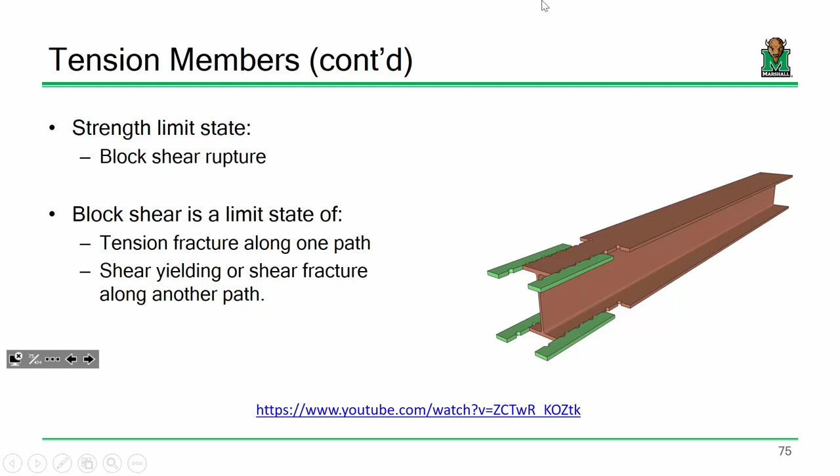So let's start getting into some stuff regarding tension members. Last time we discussed some of the various checks we perform when we assess the capacity of a tension member. Basically, we look at various different conditions, like yielding in the gross section, fracture in the net section, block shear rupture, etc.

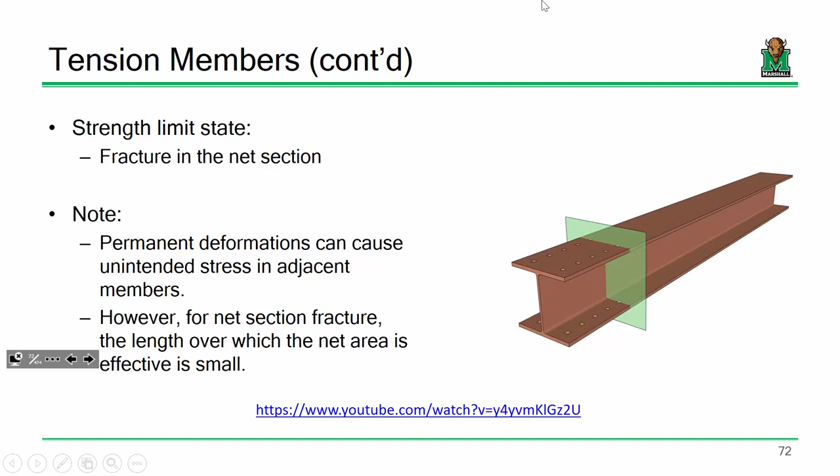And we ask ourselves, based on these failure conditions, say for instance fracture in the net section, we're talking about the phenomenon of fracture occurring right around the connection region. We call that the net section. So we identify that as a potential failure phenomenon, and then we ask, well, how do we compute the load that would cause that failure phenomenon? Another way of referring to that failure phenomenon is a limit state.

So the capacity of that member according to that limit state, if we're talking about net section fracture, would be the tensile stress times the effective net area. So we discussed gross section yielding, net section fracture, and block shear rupture. We'll talk about block shear a fair amount later.

But the idea is that, based on these given limit states, we determine how much load it would take to fail this element under that given limit state. And if we can appropriately calculate that, we can then start to ask the question: if I have a given load, what member must I use in order to safely resist those loads? And that is the design process that we're going to be conducting.

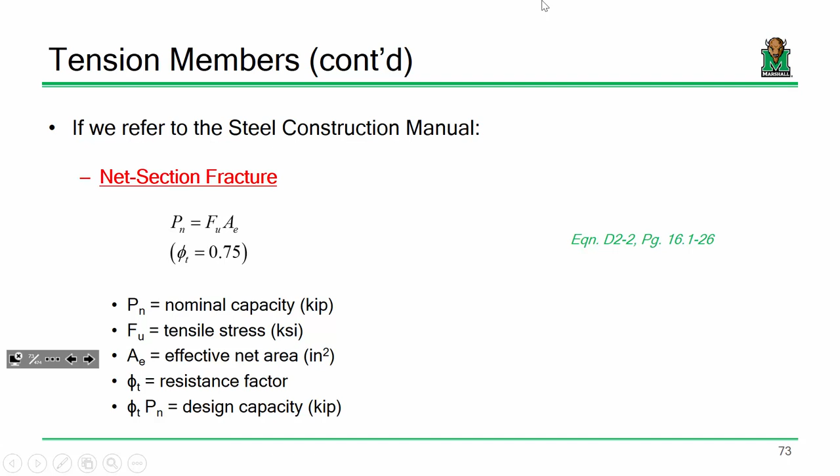All right, so far so good? So we talked about gross section yielding, net section fracture, and block shear rupture. There's also a number of other ways a tension member could fail. Maybe the tension member is fine, and as you're loading the member, maybe it's not the actual element that fails, maybe it's the connection that fails.

Maybe it's the bolts or the welds, or maybe the plate elements right around the connection. We'll talk about bolted connections and welded connections later, but it's worth mentioning. Also, maybe you've got a tension member in a given system, and it's not the tension member that fails or the connection that fails, but some adjacent element fails that disrupts the load in that tension member as well. That's worth mentioning.

All this stuff we're talking about, gross section yielding, net section fracture, etc., that's all strength limit state phenomena. The idea is if I take this member, load it, and reach that particular load, we're starting to develop the onset of failure, the element failing, not being able to resist further load. That's a strength limit state.

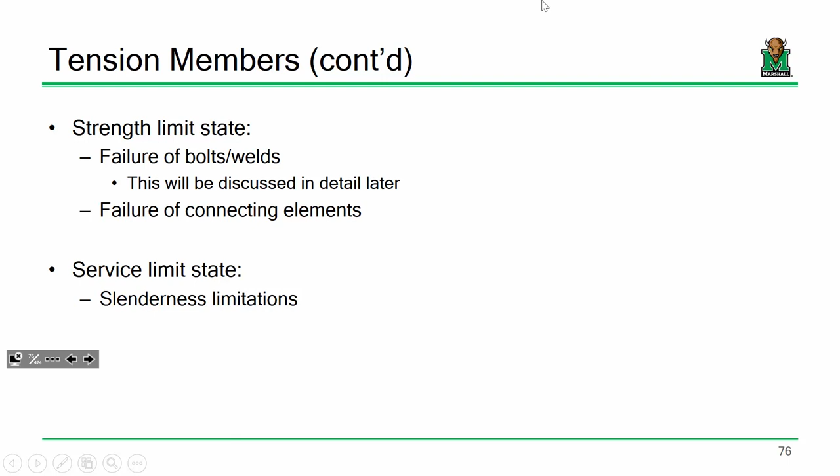A service limit state is intended to ensure that the member performs well on a day-to-day basis, that you can handle it during construction and things like that. One of the limits we're going to use is a slenderness limitation, but we'll talk about that later. Right now I want to focus on yielding and fracture. So far so good? Okay.

Now, in order to start talking about gross section yielding and net section fracture, the first thing we need to discuss is gross area and net area. By and large, the concepts are pretty basic, but we do need a fair number of examples to ensure we're able to compute these values appropriately.

In general, when we're talking about gross area and net area, gross area refers to the main body of the member. So if I've got this wide flange section and I've got a bunch of bolts going through the flanges, the gross section is just the main body of the member out here. The net section is right here around the connection. So if I wanted to calculate net area, in general, the net area equals the gross area minus however much area we're removing, in this case out of those flanges, due to the presence of bolt holes. Does that make sense? Okay.

A couple, just a little bit on terminology. What's it? Yes, sir.

Let me respond to that in this way. So you're saying there's bolts there as well. Well, when we're assessing tension members, what we're assessing is just the wide flange section itself, just the I-beam, if you will. Now later on, we're going to assess the capacity of those bolts by themselves. So we'll look at it as two separate sides of the equation: what's the capacity of the member and what's the capacity of the bolts? Right now, we're just looking at the member, so that area is gone.

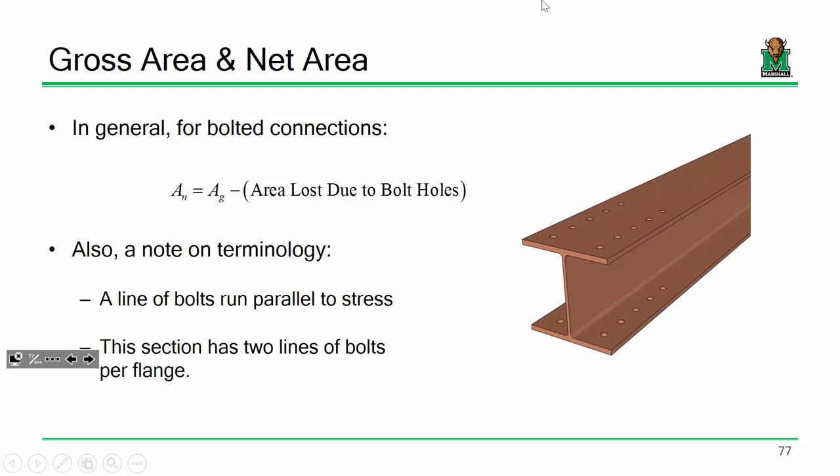Sound good? So 4 lines of 5 bolts. Okay, now let's talk a little bit about the bolt holes themselves, okay?

Now, when we calculate the diameter of a bolt hole, the way that we're going to do that is we're going to take the diameter of the bolt and add to it 1/8 of an inch, okay?

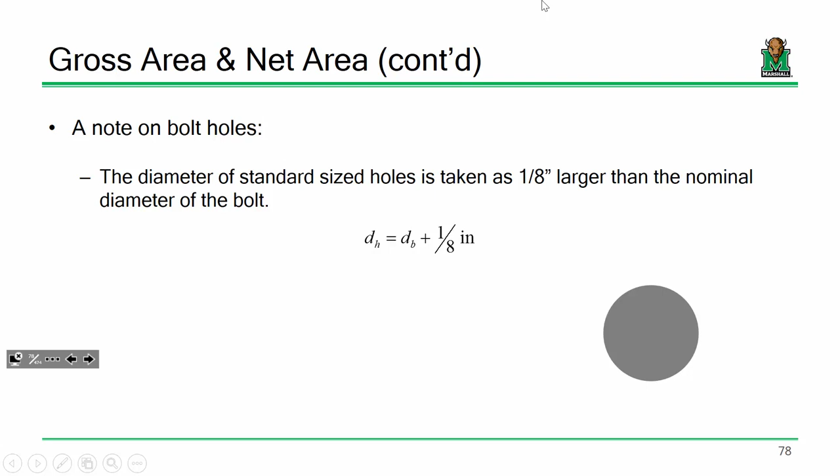Now, here's why. So here I've got an image of a bolt, just a circular bolt, okay? The first thing that we're going to do is we're going to add 1/16 of an inch to account for what we call erection tolerance.

The long and short of that is, if anybody's ever worked with their hands, doing mechanic work, working on engines, maybe working on your car or a lawnmower, let's say you've got a 1/2 inch diameter bolt. In order to secure that connection, the hole that you insert that bolt into has to be a tad larger. You can't have a 1/2 inch diameter bolt and a 1/2 inch diameter hole - you can't get the bolt inside the hole. So you have to drill the hole a little bit larger, okay?

Now, for standard structural steel connections, we drill it 1/16 of an inch larger, okay? So the hole is actually physically larger than the bolt by 1/16 of an inch.

Now that's 1/16. We also add another 1/16 of an inch to account for what we call damaged material. The idea is, whether you're drilling, sub-punching, or using a CNC, you've got to ask yourself, as you're loading this member, you're counting on this connection to transfer load to the rest of the tension member. So what we say is this small little ring of material right around the hole really isn't very effective in transferring stress to the rest of the member - so we sort of disregard it.

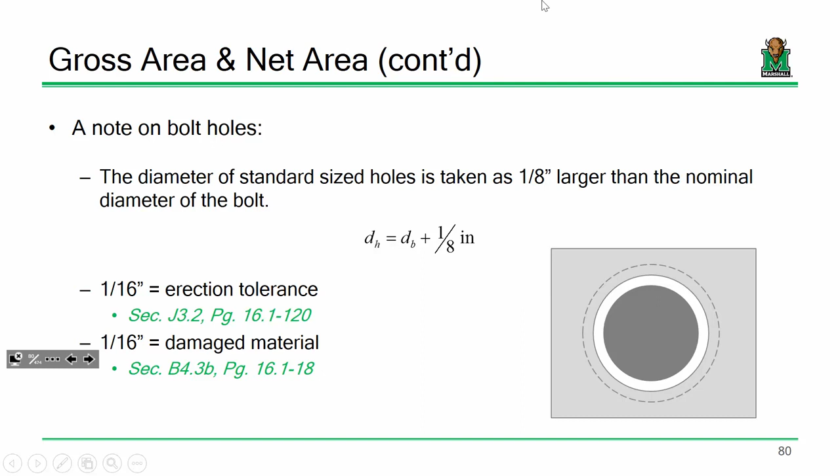One other point I'll mention - see right here, these green sections of text. I've got section J3.2, page 16.1-120, et cetera. That's a reference to the pages in the manual. So if you're wondering where this stuff's coming from, there it is.

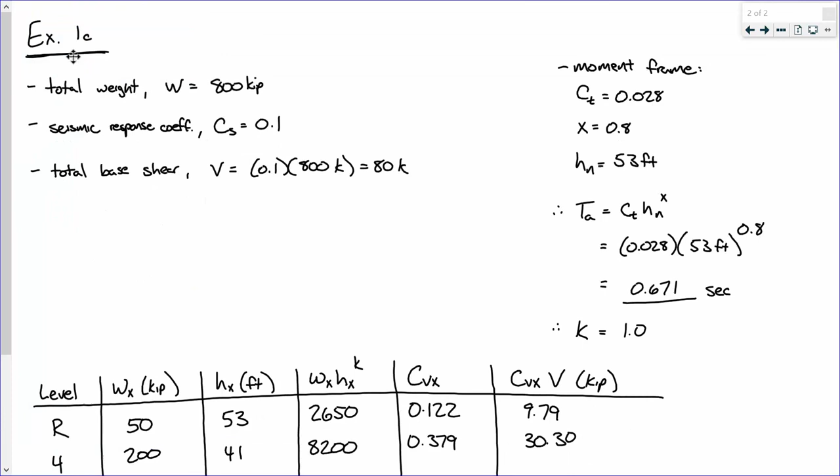So let me erase this. Okay, so example 2A. If I just look at the member in question, it's an 8 by 3/8 inch plate. It probably looks something about like this.

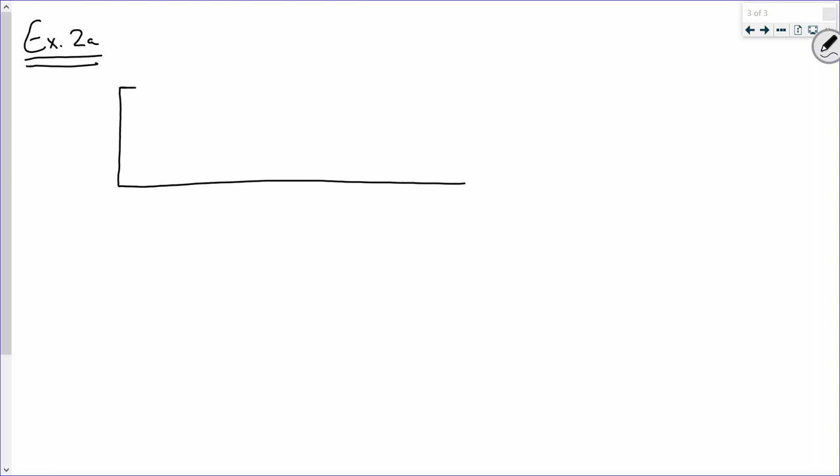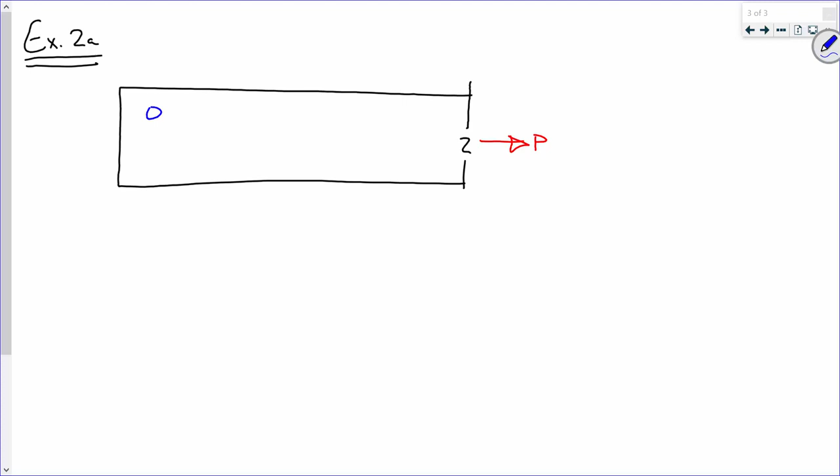I've got this, and I'm going to draw what's called a break line - that's just indicating that the member's going on forever, I guess, in this direction. And I'm applying an axial load P, subjecting this member to tension. Now I've got, what is it, 1, 2, 3, 4, 5, 6, 7, 8 bolts in a grid-like pattern, something like that. Now those bolts are, what were they, 3/4 inch?

3/4 inch diameter bolts - that phi symbol refers to diameter. And this plate is 8 inches by 3/8. Sound good?

Now let me ask you this. In general, what is the formula for net area? It is the gross area minus the area lost due to bolt holes. So if I want to calculate net area, what do you think is the first step? Calculate the gross area. So we need to start off by calculating the gross area.

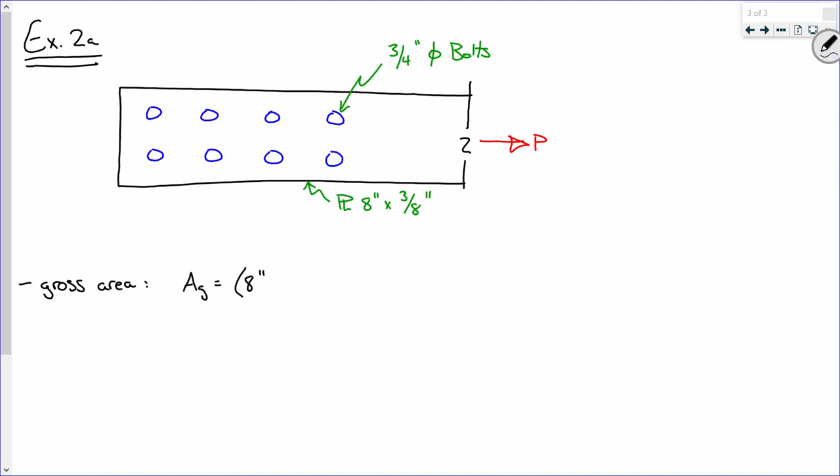So we'll call that AG. So what do you think the gross area is of this plate? Probably pretty easy to figure out. 8 times 3/8. So what does that come out to be? 3 square inches. Simple, right?

Now we need our hole diameter. Now the bolt diameter is 3/4 of an inch. So therefore, what is the hole diameter? Because we take the diameter of the bolt and we add 1/8 of an inch. So that is 3/4 of an inch plus 1/8 of an inch equals 7/8. Sound good?

Now let's talk about this - a couple of questions. Let's take it one at a time. First off, when I calculate net area, I'm taking the gross area and subtracting the area lost due to bolt holes. How many bolt holes do you think I need to subtract? 2. Everybody see that? Now if you don't, think about it like this.

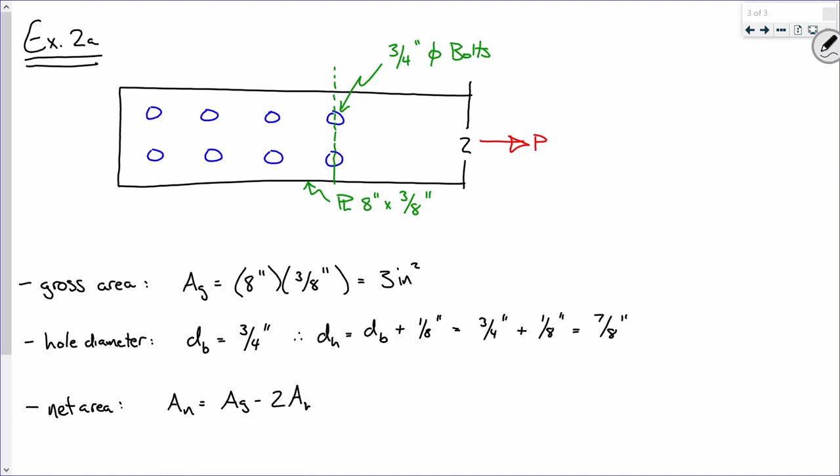So we're cutting a section through 2 bolt holes. So to start off, if I want to calculate the net area, AN, it's going to be the gross area minus 2 bolt holes - the area due to a hole. Now before we start calculating that out, let's see if we understand this. So the gross area minus 2 bolt holes. What is the area of a bolt hole?

What's the area of a bolt hole? Anybody? Pi d squared over 4, right? Sounds good, right? It's wrong. Now here's why.

Now watch this, you got to think in terms of cross sections. Think samurai sword or lightsaber through the section. So imagine if I cut this, what am I looking at? I'm looking at an element that looks something like this. So I've got a plate that goes on, and I've got some bolt holes here. Through that section it looks like that - I know it's a little bigger. This is the area lost due to the bolt hole.

Make sense? So how do I calculate the area of each of those? I take the diameter of the hole times the thickness. Does that make sense? The first time you think it's a circle, pi d squared over 4 - everybody thinks that. But you got to think in terms of cutting a section, right?

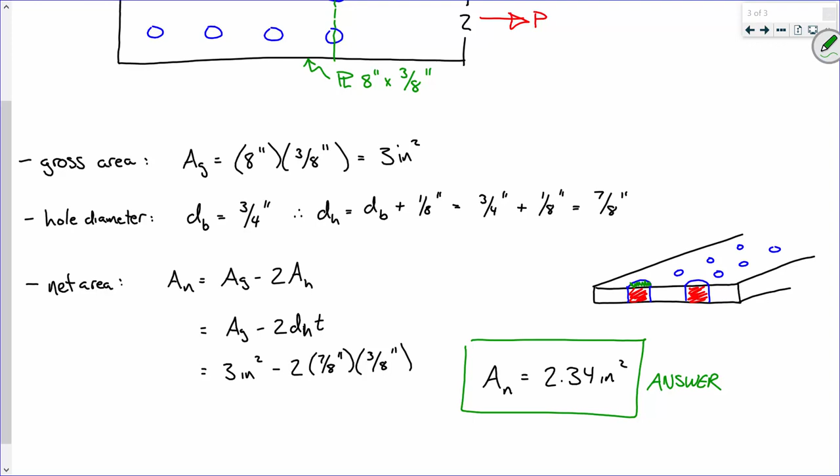Sound good? Everybody else, okay? Now, that's this one, that's a plate. Let's do another one, okay? So the next one is looking at this.

So here I've got a rolled shape. I've got a W10 by 49 that's being yanked on. Again, 3/4 inch diameter bolts are used, and we're going to go along the same process, okay? So to start, let's go into this.

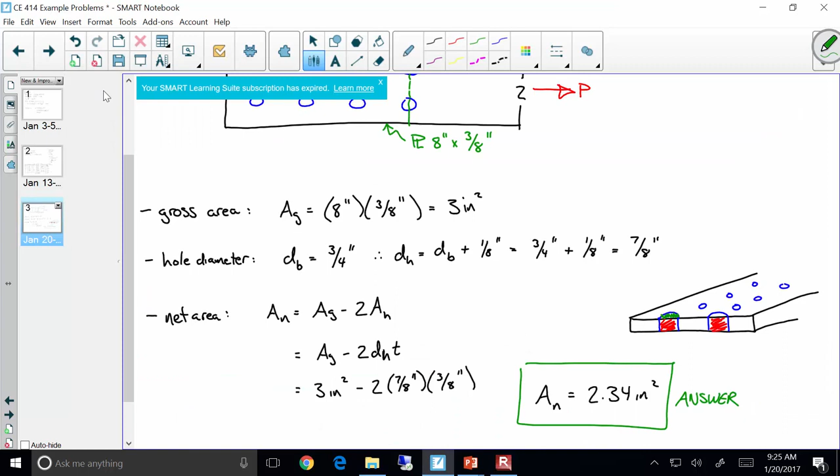So I've got this. Does everybody have the last one? Everybody have all that? Okay, so we're on example 2B.

Similar concept, okay? Now, regardless of what the section is, since you've been through one of these before, I think you can answer this pretty easily. What's the first step in calculating net area? Gross area. So what is the gross area of a W10 by 49?

There you go, so let's look it up. All right, let's leave Siri out of it.

Remember, bring your manual. Did you bring yours? They're very heavy. All right, and so, yes, the manuals are very heavy, and what I have to say to that is this. So, hold on, all right.

14.4. Okay, all right, hold on, everybody settle down. 14.4 square inches. All right, for those of you that brought your manual, let's see if everybody else found that? Okay, all right, first off, okay, that's a good question.

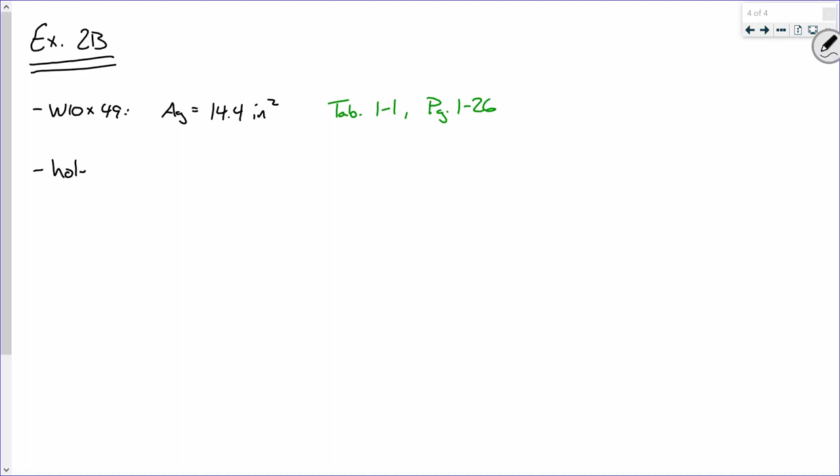Sound good? All right, now same story with the hole diameters. So the bolt diameters are 3/4 of an inch, so the hole diameters are 7/8.

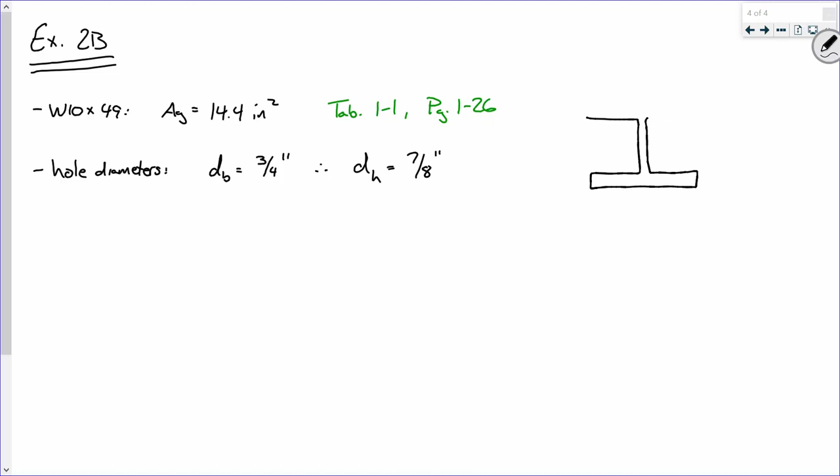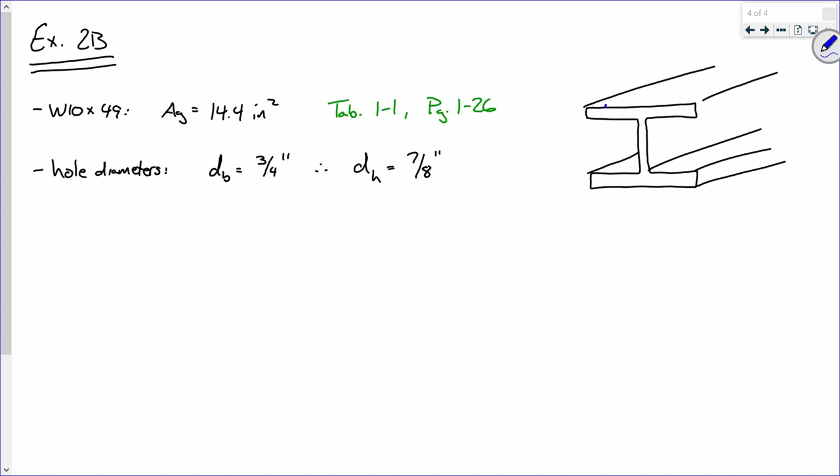Now I'm going to skip writing all that out because we know what's going on. Net area, okay? Let me ask you this: how many bolt holes am I subtracting? Four, okay? Does everybody see that? Because I've got 2 lines of bolts in each flange, right there along that section I've got a bolt here, a bolt here, a bolt here, and a bolt here. So these are what I'm subtracting.

So I propose then that for the net area, I have the gross area, and I subtract from that 4 holes, which is the diameter of the hole times the thickness of the flange. What's wrong? What am I missing? The thickness of the flange.

So off here to the side, what is the flange thickness? 0.56. Does everybody see that? How'd you find it? Google. Okay, you're pulling up the shape database.

Now, if you've got the manual, what value are we not using? You don't have the manual—no, it's 9/16. Okay, let's recall: why aren't we using the 9/16? Yeah, those are the drafting dimensions, okay? So never use the fractional values in the manual—always use the decimal values, okay? So we're using the 0.56.

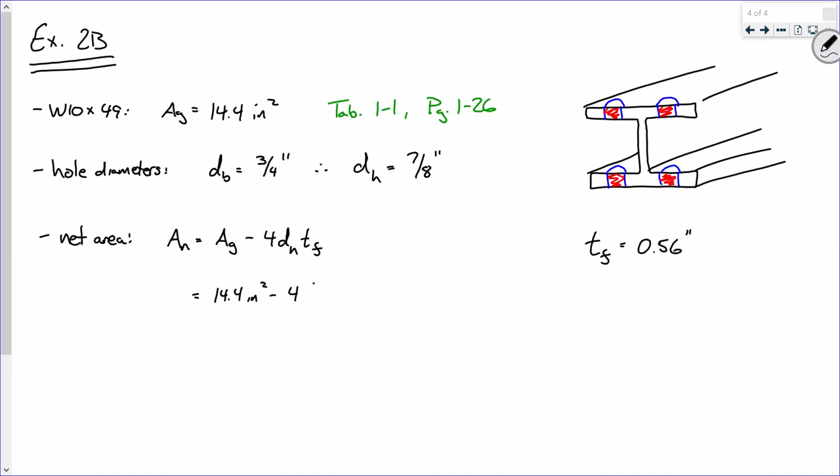So that is the gross area minus 4, 7/8, and then 0.56. So what does the net area equal? 12.44.

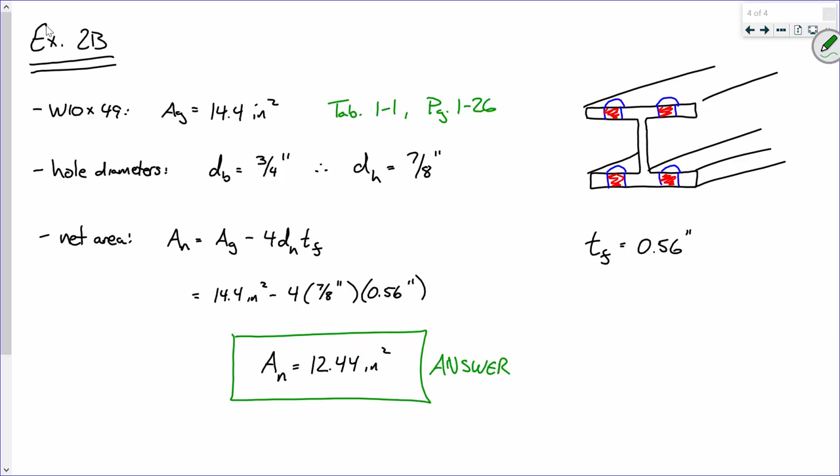Bless you. Any questions? Any questions? You good? What? Right now. Okay.

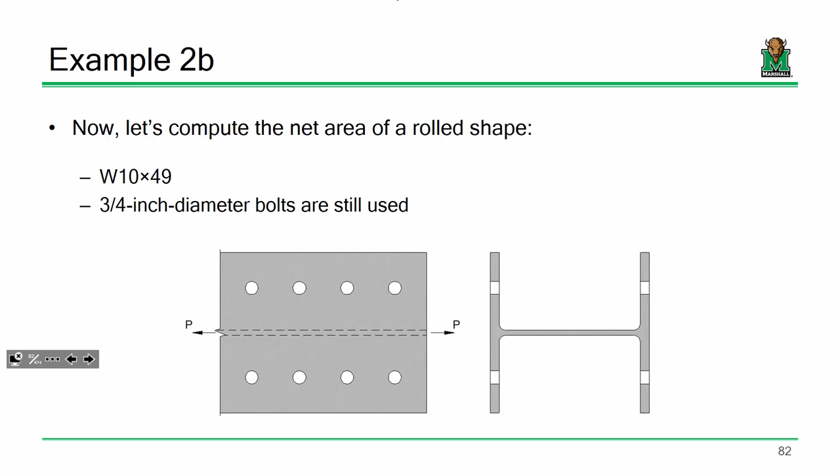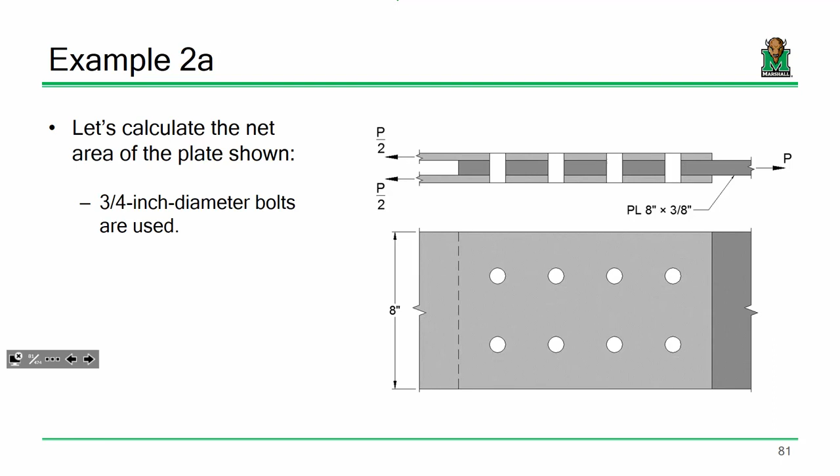Let's talk about some curveballs. Up until now, if you notice, there's a pattern associated with the connections we've been doing because they're nice rectangular grid patterns of bolts. When you cut your section, it's very easy to determine the number of bolts you're subtracting. It's easy for something like this, okay?

So I would say if you want, we can develop a formula for net area as follows: it's the gross area minus the sum of the diameter of the holes times the thicknesses, right? Bless you. That's, I think, a fairly reasonable formula, but it only works for grid-like arrangements like this.

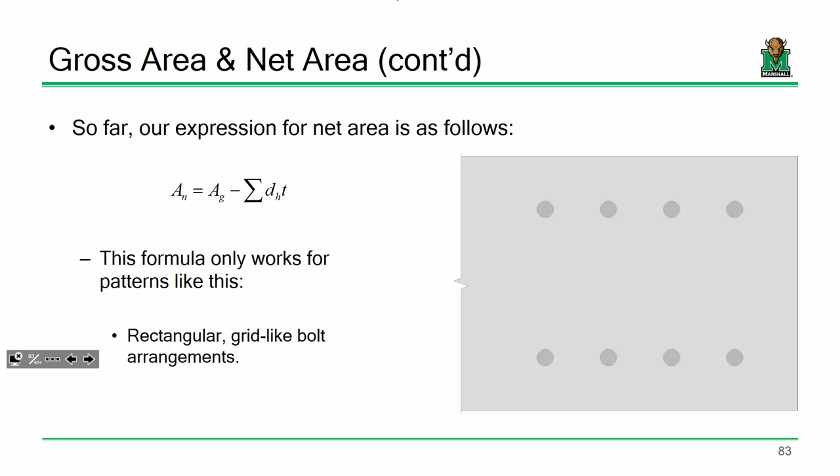Now, the first question I always like to ask when presenting this is, why do this? Why make it more complicated? Why in real life would you ever stagger a bolted connection like this? Well, the answer is really simple, okay?

By staggering the connection, what you do is stagger your failure path, and by doing that you ultimately increase the net area. Now, if I increase the net area, what's that do to my capacity? Does that make the member stronger or weaker? Stronger, all right? So if I've got a tight geometry and I can increase my capacity by staggering the connection like this, I'm going to do it, okay?

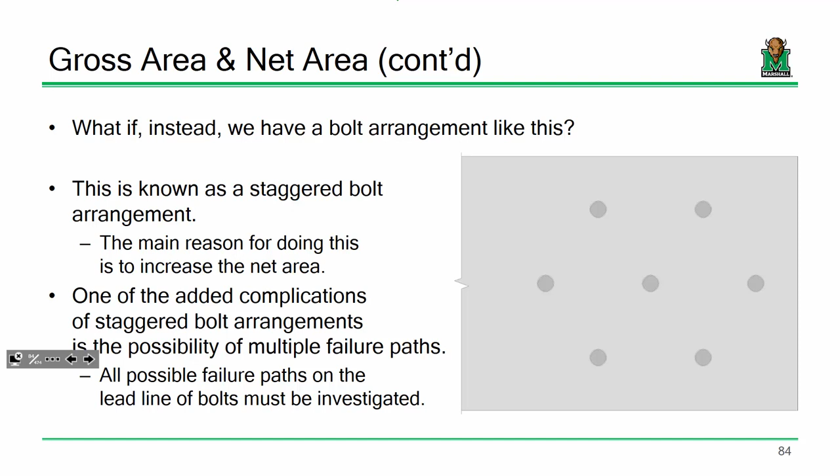Because it doesn't cost any more or less money to drill the holes—if you're using something like a CNC, you just program the machine and hit go, and it's going to go. So it doesn't really cost any more or less money. And if I can increase my capacity and maybe shave some thickness off that plate, I'm going to do it. The problem, though, is that it creates multiple failure paths that need to be investigated.

Now, to give you an idea, I've got a connection that looks something like this. One potential failure path would be just right through that first bolt. Another potential failure path might be something like this—I fail across those two bolts, but then notice how I've got that one staggered path I have to deal with.

Another potential failure path is something like this. Unfortunately, the long and short of it is we just need to go through all of them and see which one is the worst case scenario.

Now the problem is that if you actually start going into mechanics of materials and trying to calculate the stresses along a bolted connection where you've got staggered paths, the actual theory behind it is really complicated. It gets really tough - you've got contact stresses and whatnot, it gets a little nuts. We engineers have to be able to account for this diagonal failure path, but we need to do it in a reasonable fashion.

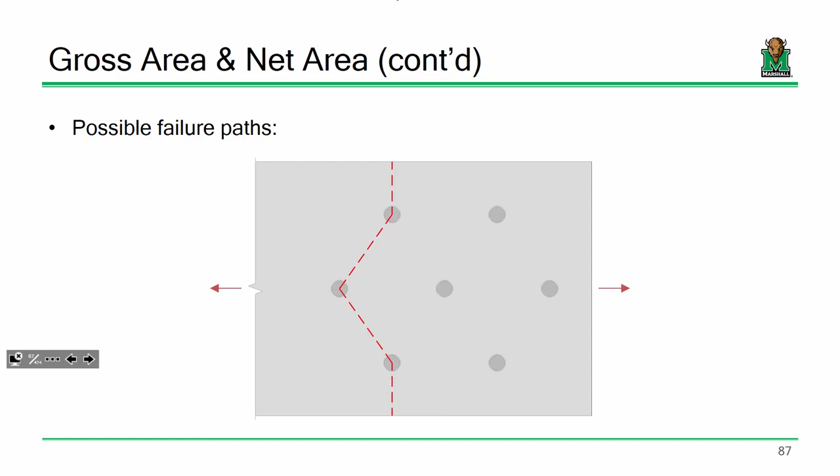Now, the way that we account for a diagonal failure path is for every diagonal failure path, we add what's called a stagger factor. A stagger factor, to compute it, is S squared T over 4G. S is the longitudinal spacing of that diagonal failure path, and G is the transverse spacing. So here I've got an image showing a particular staggered connection. If I'm talking about this diagonal failure path right here, for every diagonal failure path along my staggered connection, I'd have to add a stagger factor for this diagonal path. This dimension here is S, and this dimension here is G.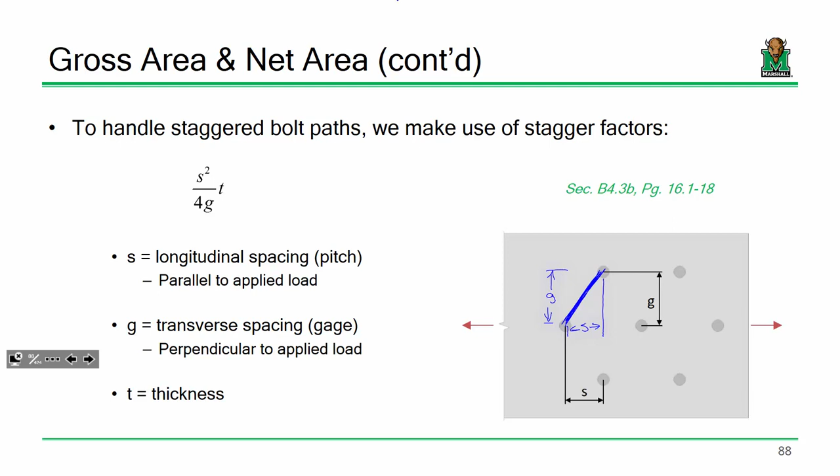Now, the difference is S goes parallel to the stress, G goes perpendicular. So longitudinal spacing is along the member and ultimately along the stress. G, transverse spacing, is perpendicular to the stress. Sound good? Everybody okay with that?

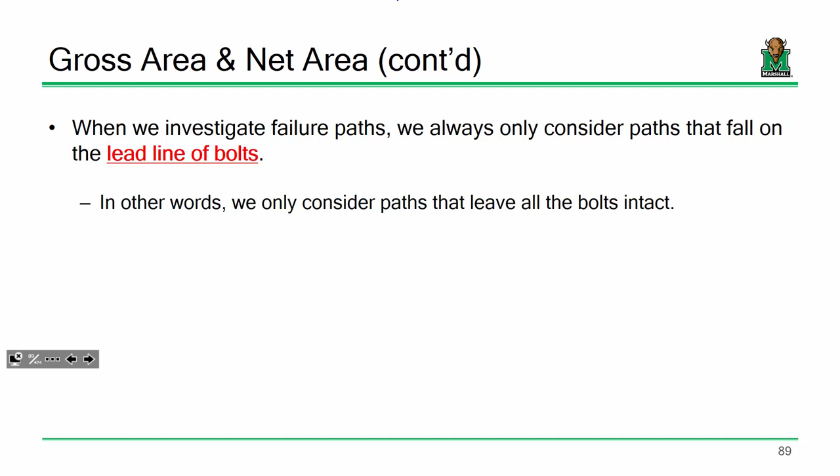Now, this is sometimes a confusing topic, so everybody will want to pay attention to this. When we look at staggered connections, we always only consider paths that go along what we call the lead line of bolts. In other words, the lead line of bolts is the failure path that leaves all of the bolts intact after failure. So I want you to go through with me on this, and I think you'll kind of see what I'm talking about.

Yes or no? Yes, because all the bolts remain intact. Now, would this path fall along the lead line? No, because the front bolt will have sheared off. We don't consider that section because if we look at the stresses along this section, they're actually less than what's going on out here, because this bolt's already picked up some of the load. So it might be a smaller net area, but it's ultimately seeing less load than some of the other sections, so we don't have to consider it.

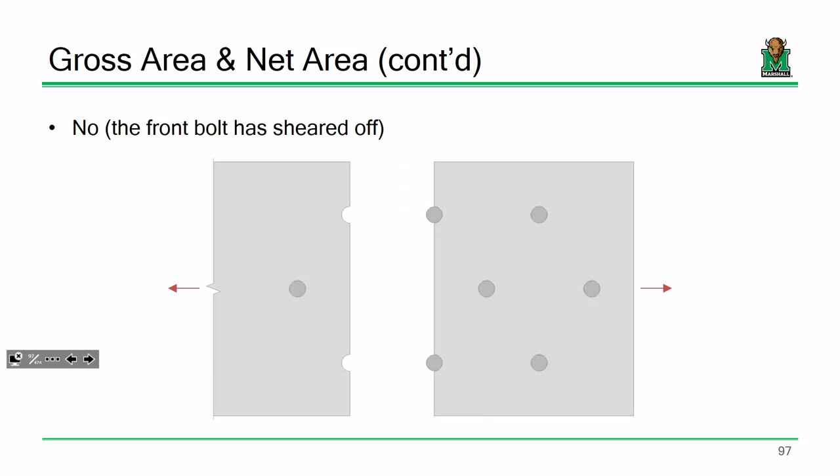Okay, so I would argue that our final expression for net area looks something like this. We would take the gross area, subtract any area lost due to a bolt hole, and then add any stagger factor associated with the diagonal path, to account for the increased area along that diagonal path.

Now that is for bolted connections, and this whole time we've been talking about bolted connections. Well, for welded connections, it's a whole lot easier, because if I've got an angle fillet welded onto a gusset plate and I'm yanking on it, the net area equals the gross area. Keep in mind, when I compute net area, I'm trying to compute the area that has been removed due to the presence of bolt holes.

Well, if it's welded, we didn't remove any material, so it's just equal to the gross area. So the bolt never comes off with the plate that gets pulled away and stays intact. If you pull it and it separates along the line of the bolt, the bolt never goes with the plate.

No, because the idea is that these bolts are connected onto a plate below it. You're taking member 1 and member 2 and connecting them. And if member 1 fails, member 2 is still there, and it's going to hold all the bolts. Does that make sense?

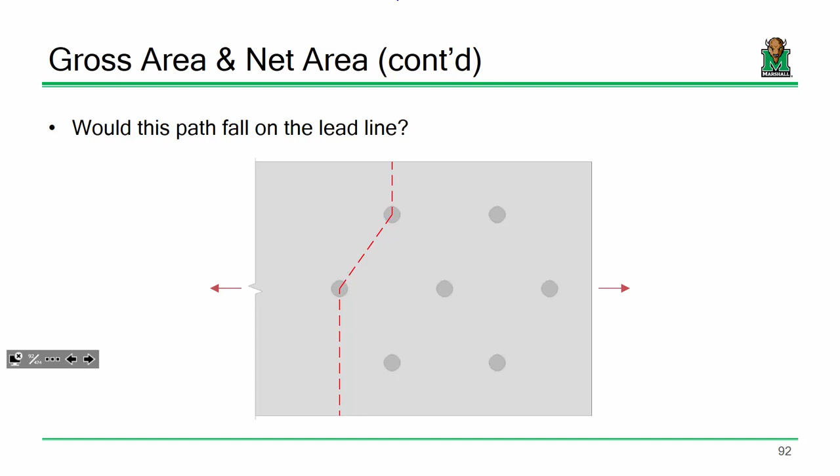We're calculating the fracture capacity, and we'll say it's 200 kips. We're just going to ensure that that fracture capacity is larger than the loads being applied to it, and then no fractures happen. That's the whole point. But I see what you're saying. Does that kind of make sense? Again, we're trying to prevent that from happening. So far, so good? Okay.

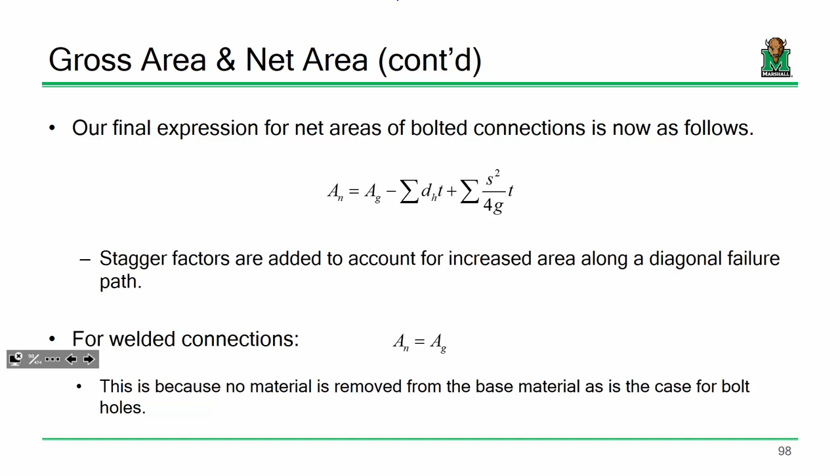Any other questions about this? All right, now I want to at least start into this calculation. We're going to look at computing the net area of this plate that's shown, this darker plate. I do want to ask a couple questions so that everybody's aware of what's going on. Now, I've got a particular diagonal path. Let's say it's this one, somewhere right here. Let's say that's a diagonal path.

Help me out, what is the S spacing for that path going to be? 1.5 inches. What is the G spacing going to be? 3.5 inches. Make sense? So what's the thickness going to be? 1 inch. Everybody see that right there? So for each one of those diagonal failure paths, the calculation of a stagger factor is pretty simple, right? I actually do want to get some calculations started with this example, and then we'll attack this next time. But has everybody got this? Okay.

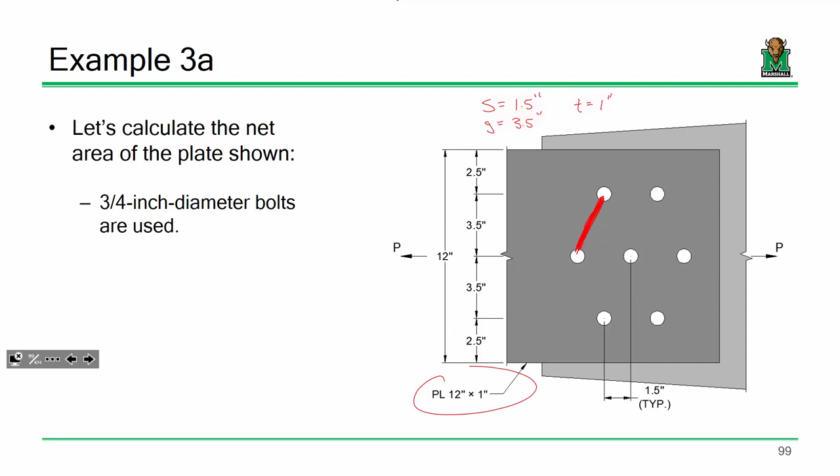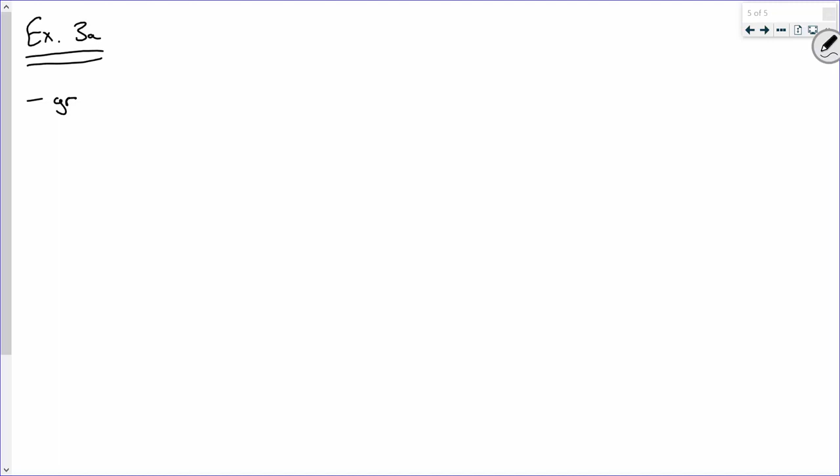Okay, now so we're on example 3A. Regardless, what's the first step in calculating the net area? Gross area. So what is the gross area? Well, 12 inches squared. So 12, or getting ahead of myself, is 12 square inches. Okay, all right, so there's that. Let's also discuss the

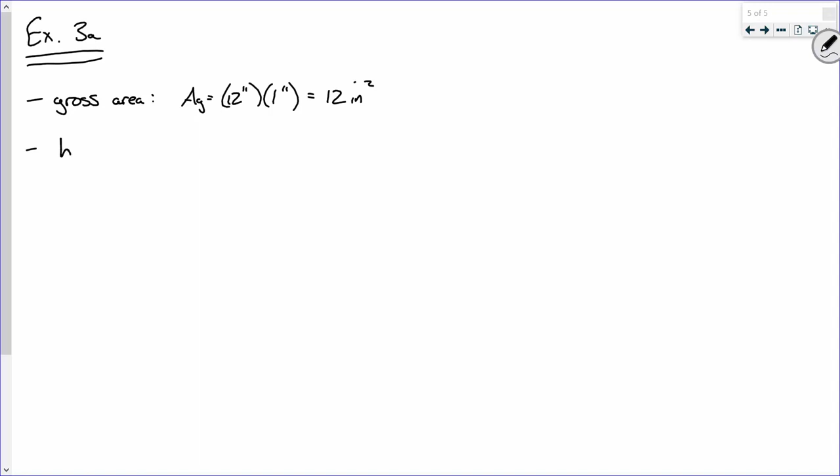bolt holes. Now, we've got 3/4 inch diameter bolts. So what is the hole diameter going to be? 7/8. So what is the area of a hole going to be? Just a single hole. 7/8 inches squared, because it's the diameter. Here, let me write it out. It's the diameter times the thickness. Oh, I didn't actually do that. So if you want, you can say something like 0.875 inches squared. All right, sound good?

Okay, now let's also talk about stagger factors. All right, so I'll call that SF for a stagger factor. I would compute that by saying it's S squared times T over 4G. All right, and it's a very nice little plug and chug expression. So tell me, what's S? 1.5. All right, what is T? And that's squared over 4 times, and what's G? All right, and what do we got when we plug that out? Anybody? 0.161, is that what you got? And that's square inches, okay?

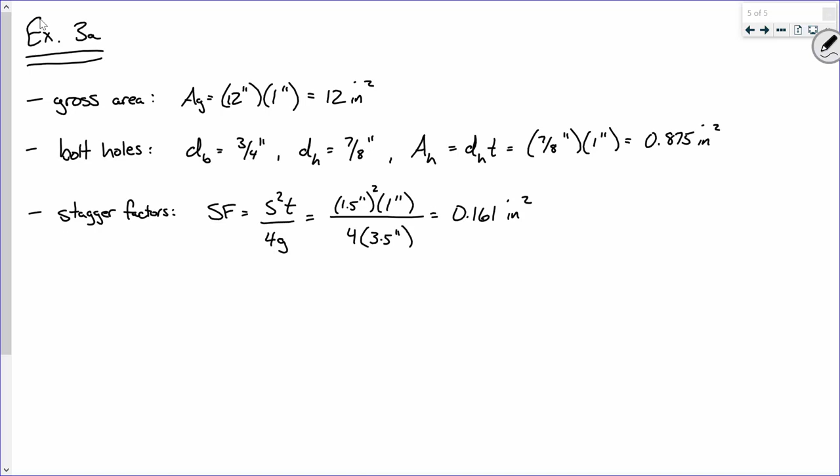Everybody got that? Okay, now here's what we're going to do next time. Next time, we're going to identify all of the potential failure paths associated with this connection, and then we're going to continue that on with an example that I think is a little more complicated, but let me explain what happens on this next example. It's a funky one, but you kind of have to think about it a little bit. Ultimately, I want to see your ability to assess stagger across different elements of the angle. The long and short of what we're going to do is use the samurai sword or the lightsaber in an interesting fashion. Instead of dealing with this angle, which can be complicated to determine your gauge spacings, I'm actually going to cut the angle right here and take this piece of the plate and stick it on top right there. So you got the bolt hole right here. And I'm actually going to treat this angle as if it was one big plate, okay? And we'll do something very similar.